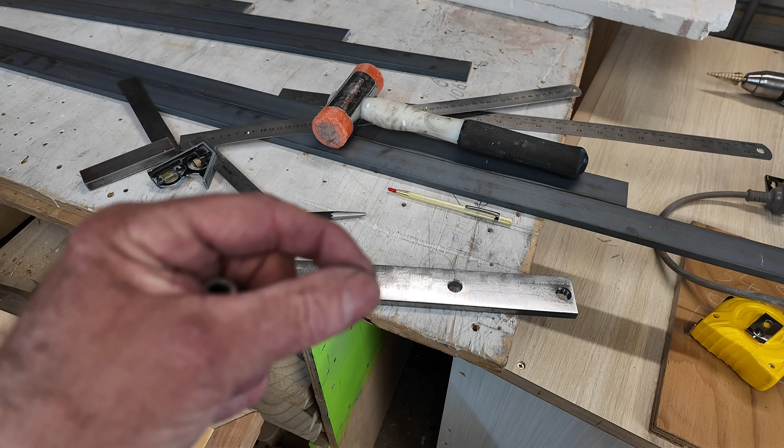It's reasonable. There is some issue that when and how you hit will move the center mark slightly. The steel will deform in a particular way, so it's tiny, but you really want to make sure it's moving, in this case backwards and forwards, this way and not this way. Anyway, I have marked, center popped, center marked, and drilled to 13 millimeters.

Then I got my non-starting 14x1 tap and got it started, and believe it or not, it actually didn't do too bad a job. The cleanliness of the threads isn't that great, and I'd like to have a tiny little deburring tool, wire brush sort of thing go down there, but I've just tried it, and that's why I ran inside. No, I didn't. I meandered inside. Get the camera.

They fit. Not too bad. Thank you very much. In fact, let's just have a look. Whoa, that thread isn't too bad, because quite often when you cut the thread, there is a little bit of intolerance, but 13 millimeter hole, 14x1 thread, and this 10 mil bar, they don't stick through. We have at least got a thumbs up for this stage.

I have to make sure that the next threaded hole and the next and the next are as accurate as I can get, and that's why I was making the mention that we need to be able to use a running measurement. So we start there and we keep on marking without moving the rule, so that our marks are as accurate as possible. We can't use like a set of dividers where you can scribe the marks, each one.

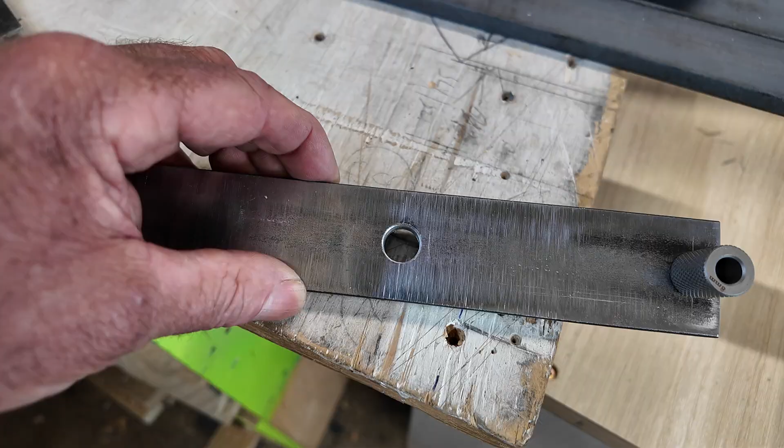As I was saying, you might not be able to see them anymore, but the lines that the scribe etches into the steel are very, very fine. It's actually nice to see. You probably can see it in the screen, but it's just pleasing. All these things working well together.

The big plus was brand new drill bits that I've got out, and I'm putting them back in there, so I'll make sure I only use those. This is not so brand new, but that's the 13mm bit.

But I think the saving grace, I was watching John Hines the other day, and I don't know how long ago the video was made, but he was making a whole series of holes in this tool that he's making, a clamp sort of gizmo thing, and he was making it out of steel and aluminium. And he does the tapping exactly the same way as I do, and that's just by putting the bit, the tap, in the chuck, and then winding it, starting it by hand.

And as it turns out, and it was a bit of a late realization, the chuck key handle is actually the right size, so you get a little bit more leverage, and that actually made it really, really nice. He was saying he took virtually half a day or all day or something to do all the holes that he had to do, and I was thinking, yeah, I hear your pain there, brother.

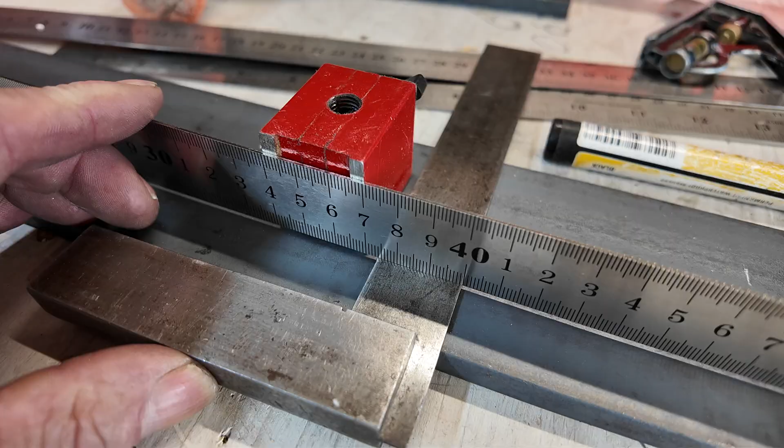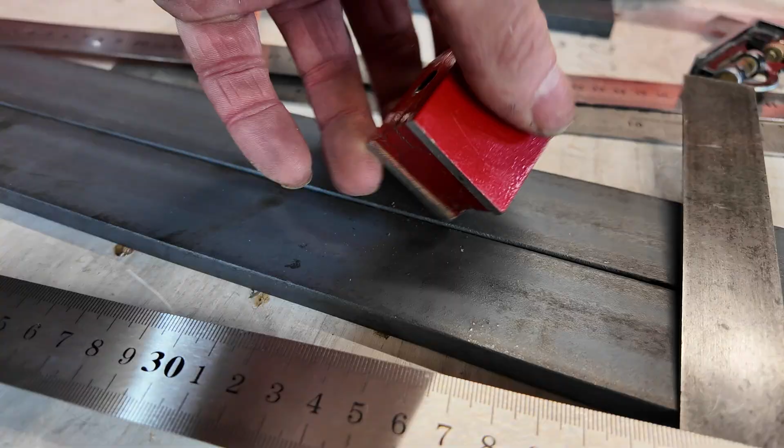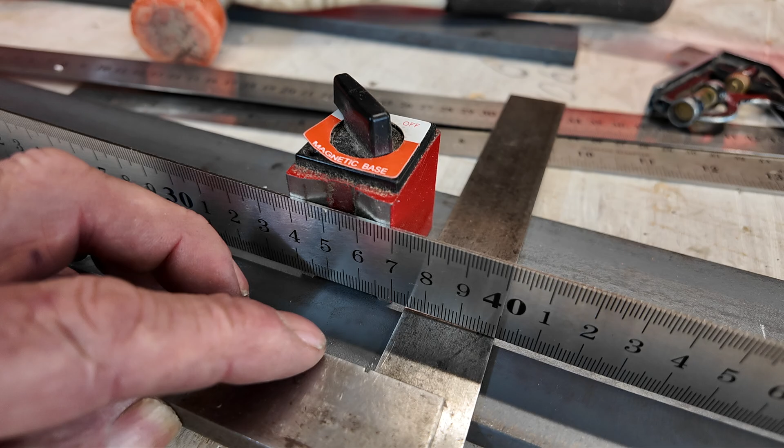Okay, so I'm just thinking out loud. Can we position the rule at the mark and move it along to the next one, the magnet holding it in the correct position? Wish it was a bit stronger. Let's try it a different way, because depending on the surface area, that's got a fair bit of grip. Yeah, it's not that strong. Damn. But I was thinking, I'd have to prop the rule up to the correct amount. By aligning the very edge of the rule and the square, I can then move it along.

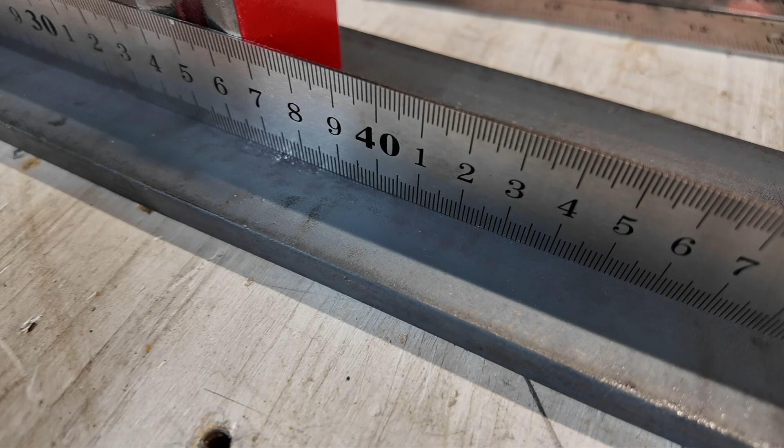Is etching better, or is this way better? Well, it's going to be etched, but the idea is also, if that's down hard on the steel, I can run the tip of that down the etching of the rule onto the steel and mark it. But then can I actually... You can hear all the indecision, can't you? Because I'm doubting myself for good reason. If I did this, I'll just put a little mark there and there, and ink that area, and I'll do this for all of the positions.

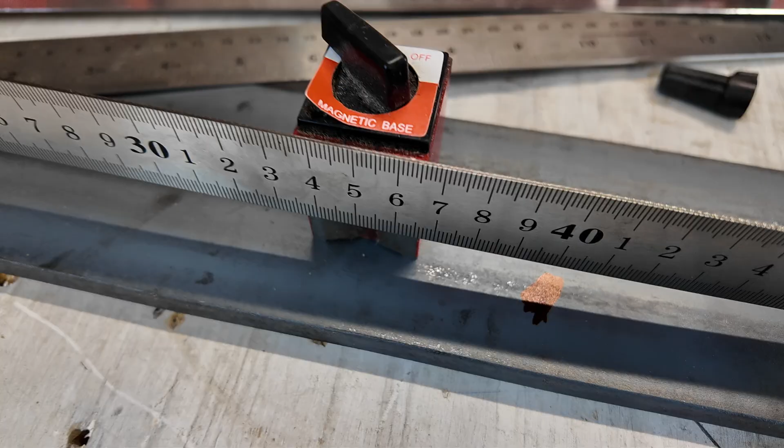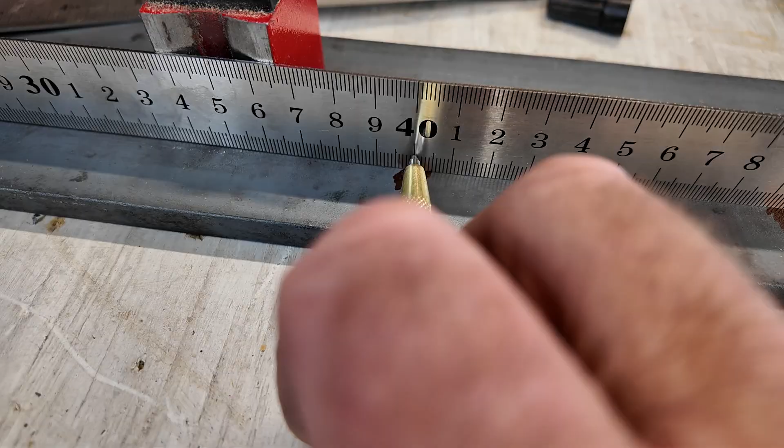If I come in, locate my scribe on the mark on the rule, you see it's on a bit of a bloody angle, don't like that. And the rule is movable, so not so good, but I can get my tip in the etching. It's not that it doesn't work, it's that it's doing each one incrementally, like additionally.

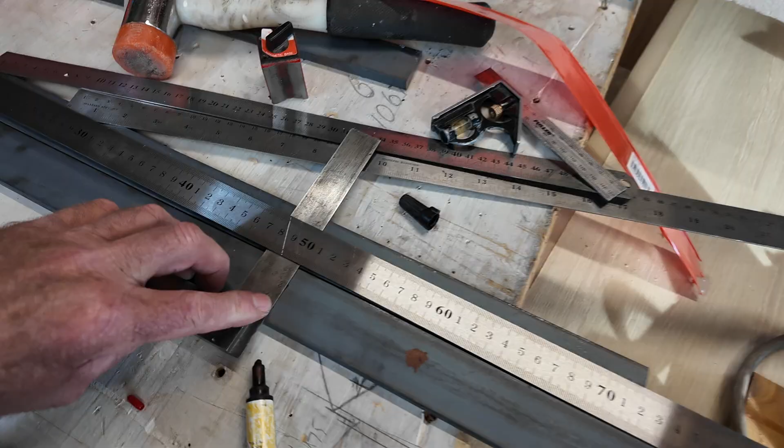Still lots of pause and thoughts there, isn't there? I'd thought about that, but as you drop off the edge of the rule, you're in space, and you might move. I've got a feeling, and this is how I sometimes do my woodworking type thing, it would be better to try and align visually that mark. It can be located with the magnet or a clamp or something, and as I go along, line it perfectly.

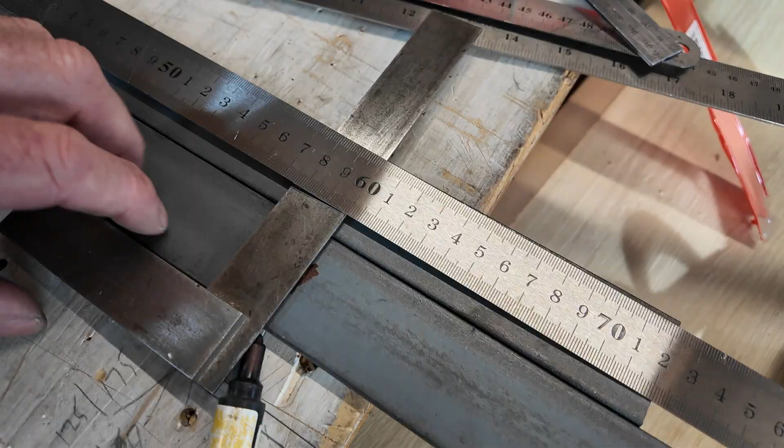I've got the double point on the rule there. Mark it that way, because, again, you're putting up with all my umming and ahhing. So if I put the magnet in place, I can then use that as my reference to butt my rule up to, and then even if I mark, remove, scribe, put it back on, the rule is going to be in the same place, because it's only going to be butted up against that magnet. It can't go anywhere else.

So I'm not pushing on it too hard. It's just a reference. Do the next one. Make sure the rule's up against the magnet. Etch it. Scratch it. Do the next one, etc., etc. It doesn't settle well with me, but my idea of using the etching lines for this...

Oops, sorry, bad production value there. Pointing camera in right direction, David. Okay.

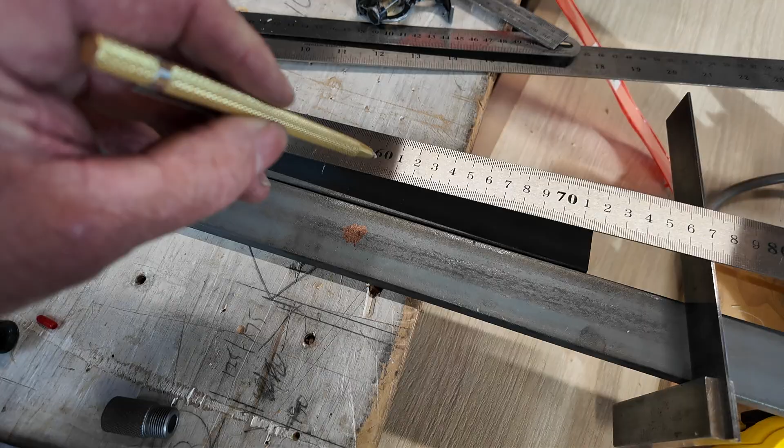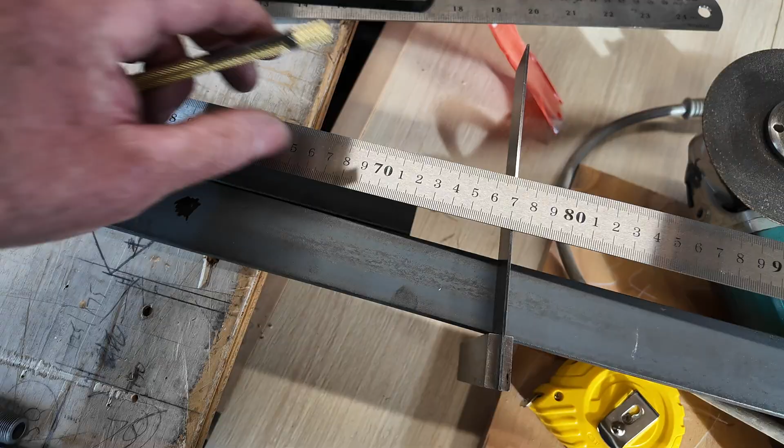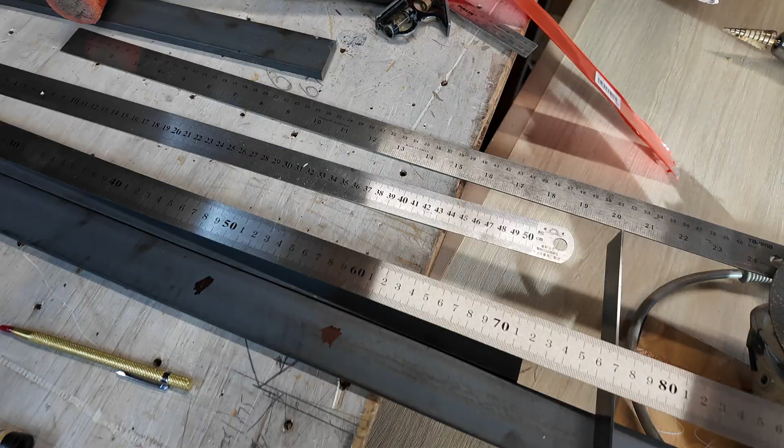Yes, that does locate well there, but it's hard to mark. If I put a small drill at that point, can I use the tip in those points to give me the arch? I could just do a little bit of a movement like that. What say I drill the lesser rule in the manner I just mentioned and see whether the damn thing works. You can soon eyeball whether the holes line up with the lines, because optically you actually do pick up the discrepancy. Physically, measuring them might be difficult, but you can actually see whether it works or not.

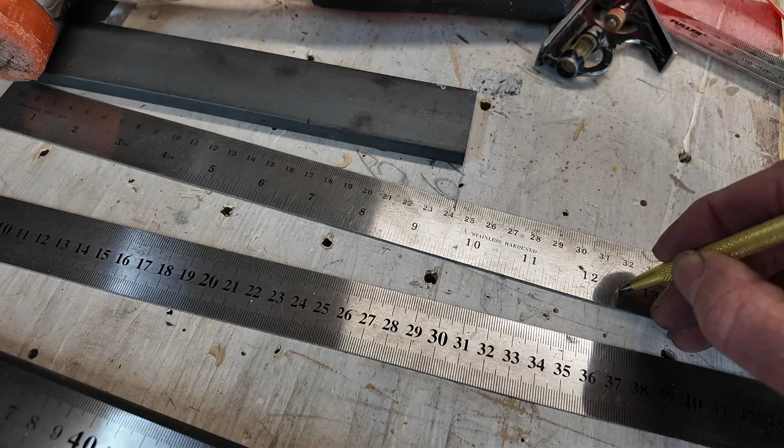So I wonder whether just by putting them at that very point there, do a bit of a center punch, drill it with a very fine tip, I can then work out which size drill would allow that tip to go through to allow for the etching. And if that worked on my trial piece, then come over, put my center marks here with the optical punch, center pop marks, and drill those as well. That might be worth a go, because if it does work, it will make life a little bit more logical.

I was actually saying to a young woman at the engineers supply, I've chatted to her before, and she's very knowledgeable, that I'm a builder, not a metalworking engineer sort of person. So it's almost like I'm doing an apprenticeship in this area, but without supervision, which is always dangerous, because you go off with these good ideas and they bite you in the backside, and it can be costly.